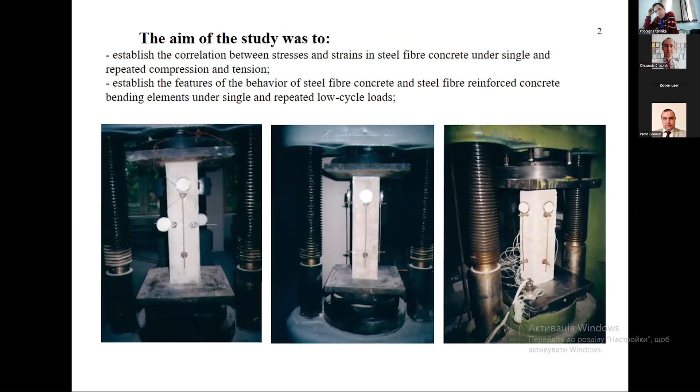Also on slide 2, we can see the view of concrete and steel fiber concrete prisms during their testing in a hydraulic press. On the next slide 3, we can see the general view of steel fiber concrete beams during their testing. The first beam, basic of each type of experimental sample, was tested under single loading until failure.

The load bearing capacities were as follows: for the steel fiber concrete beam, equal 3 kilonewtons. For the reinforced concrete beams, equal 30 kilonewtons. And for the steel fiber reinforced concrete beams, equal 27.5 kilonewtons. The tested beams were subjected to low cycle loading with a total of 10 cycles, followed by additional loading to failure during the 11th cycle, with the exception of beam 2BSFRC3, which was tested over 20 cycles.

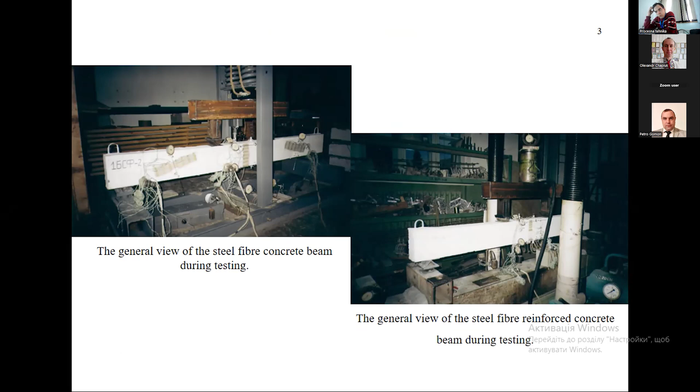On the next slide 4, we can see the cubic and prismatic strengths of concrete matrix and steel fiber concrete for different series of specimens. In particular, during the compression tests of concrete and steel fiber concrete specimens, a number of distinctive features of their deformation and fracture were observed.

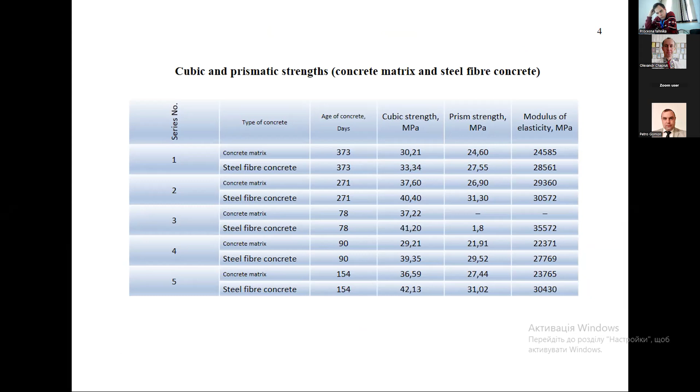Namely, when loaded from the natural state, the average prismatic strength of steel fiber concrete of the second series was 31.3 megapascals, and exceeded the strength of the concrete matrix by 16.4%. It should be noted that the prismatic strength of steel fiber concrete calculated by formula has a good congruence with the experimental data and is 32.07 megapascals.

On slide 5, I have shown the correlation between stresses, sigma concrete, and longitudinal relative strains, epsilon concrete, under a single load to failure, the graph A, and the elastic modulus versus load level in concrete prisms, the graph B.

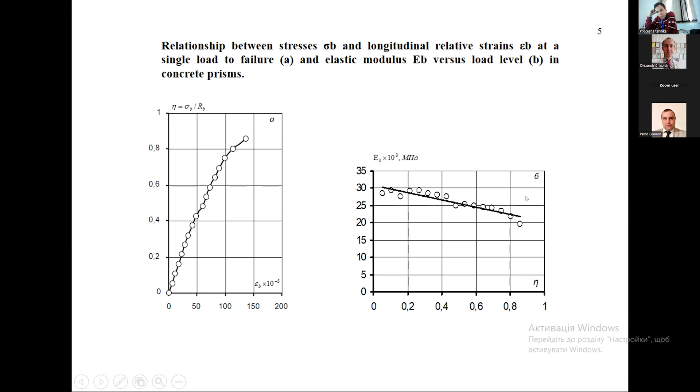On the next slide 6, we can see the correlation between stresses, sigma steel fiber concrete, and longitudinal relative strains, epsilon steel fiber concrete, at a single load to failure, the graph A, and the elastic modulus versus load level in steel fiber concrete prisms, the graph B.

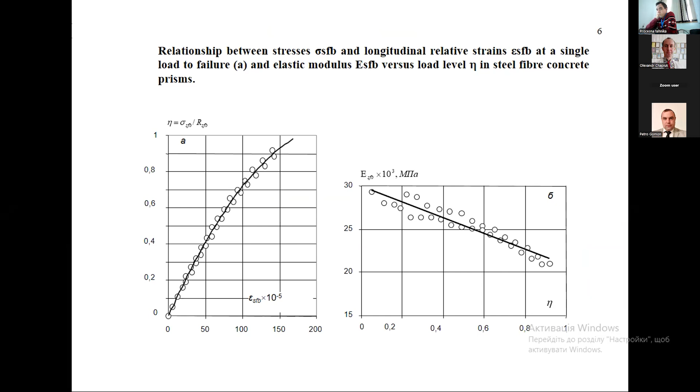The graphs in slides 5 and 6 show that the deformation of the steel fiber concrete prisms from the beginning of load until failure was similar to that of the concrete prisms. The relative longitudinal deformations developed almost identically in both cases. The difference is that when concrete reached its ultimate deformation, conventional specimens failed brittle and with concrete crumbling. In turn, steel fiber concrete prisms with 1.5% fiber content could withstand approximately 16% more load.

Slide 7 shows the graphs of deformation of steel fiber concrete and reinforcement, the graph A, and deflections for beam 2BSFRC1, graph B. In particular, the load-bearing capacity of the beams from the first and second series tested under single loading was 27.5 kilonewtons. The first cracks appeared at a load equal 5 kilonewtons with a crack opening width of 0.02 millimeters.

Compared to reinforced concrete beams, these cracks appeared more frequently and intertwined with each other. No inclined cracks were observed. The beam failed gradually without concrete spalling as a result of the reinforcement reaching its limit deformations. The deformations of the extreme fiber in the compressed zone at failure were epsilon steel fiber concrete 308.5 × 10^-5, and the reinforcement deformations were 290 × 10^-5.

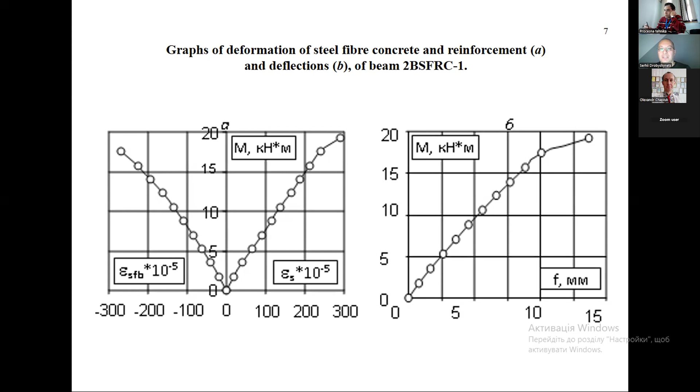On the next slide, 8, we can see the graphs of deformation of steel fiber concrete and reinforcement, the graph A, and deflections, the graph B, in beam 2BSFRC2 for the first, second, third, fifth, 7th, 10th, and 11th load cycles. The performance of this beam was studied under repeated loading at a level of loading 0.75. The load-bearing capacity of the beam was 30 kilonewtons.

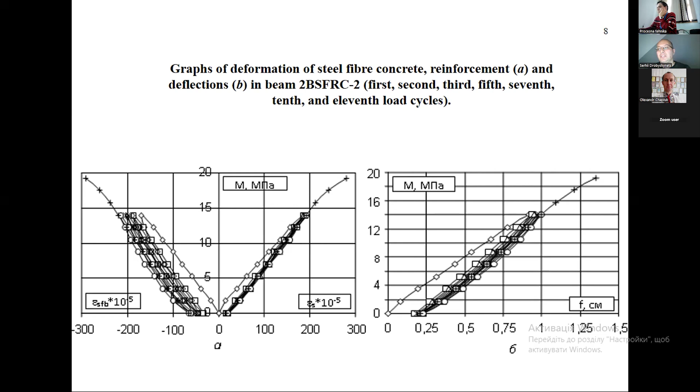Cracks began to appear during the first cycle at a load of 5 kilonewtons, extending across the entire span of the beam and spanning vertically to a height of 2.5 to 7 centimeters. With an increase in load to 7.5 to 20 kilonewtons, new cracks formed.

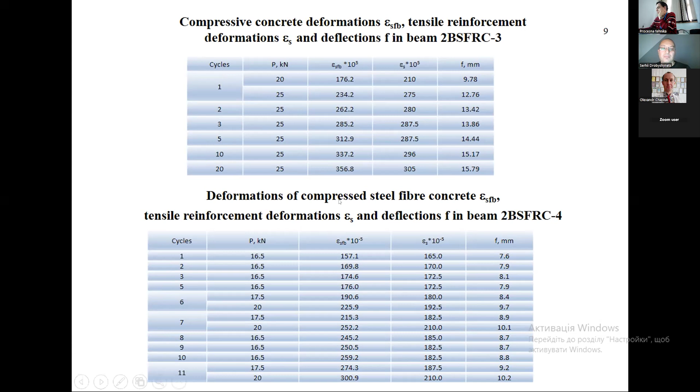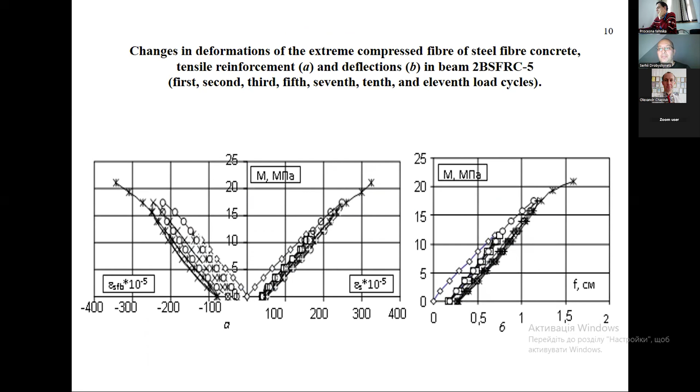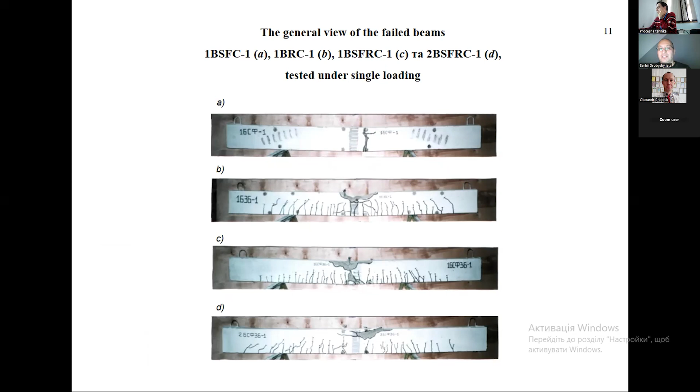On the next slide 10, we can see the changes in deformations of the extreme compressed fiber of steel fiber concrete and tensile reinforcement, the graph A, and deflections, the graph B, in the fifth beam of the second series of beams. On the next slide 11, we can see the general view of the failed beams tested under single loading. And on the next slide, we can see the view of the failed beams tested under repeated low cycle loading for different beams.

And on the last slide, we can see the main conclusions. First, the failure of steel fiber reinforced concrete beams occurred gradually along normal sections due to reaching ultimate deformations in the reinforcement without evident crushing or spalling in the compressed zone.

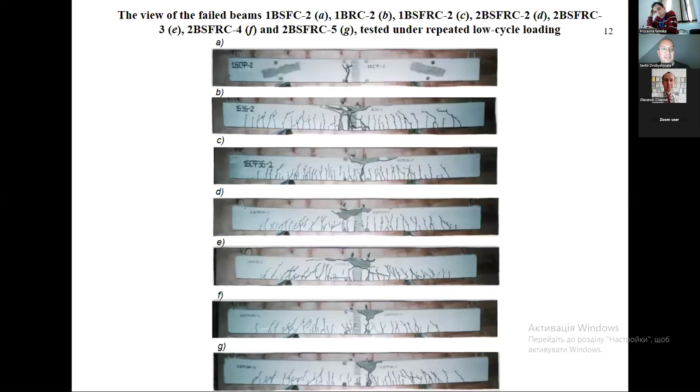Second, stabilization of compression deformations in steel fiber concrete, tensile deformations in reinforcement, and beam deflections at a level of loading less than 0.6 occurs during the third to fifth load-unload cycles, and at a level of loading less than 0.75, stabilization occurs during the fifth to seventh cycles. Increasing the load level during certain cycles disrupts the stabilization of deformations achieved in previous cycles, leading to significant residual deformations that depend on the level of additional loading.

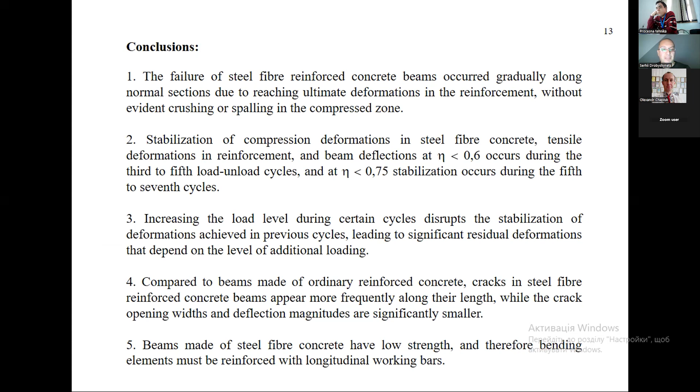Therefore, compared to beams made of ordinary reinforced concrete, cracks in steel fiber reinforced concrete beams appear more frequently along their length, while the crack opening widths and deflection magnitudes are significantly smaller. And the last, fifth, beams made of steel fiber concrete have low strength, and therefore bending elements must be reinforced with longitudinal working bars. Thank you for your attention.